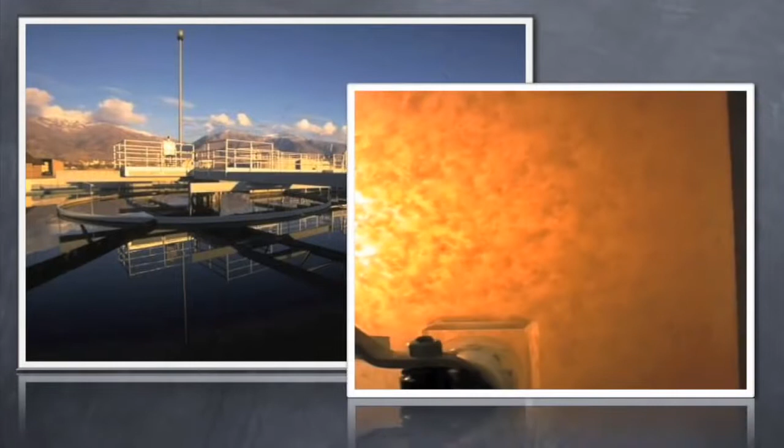The purpose of this video is to help you better understand the function of a clarifier and start you on your path towards effective clarifier operation. The purpose of a wastewater treatment clarifier is to slow the water down enough such that suspended particles can be separated out by the force of gravity.

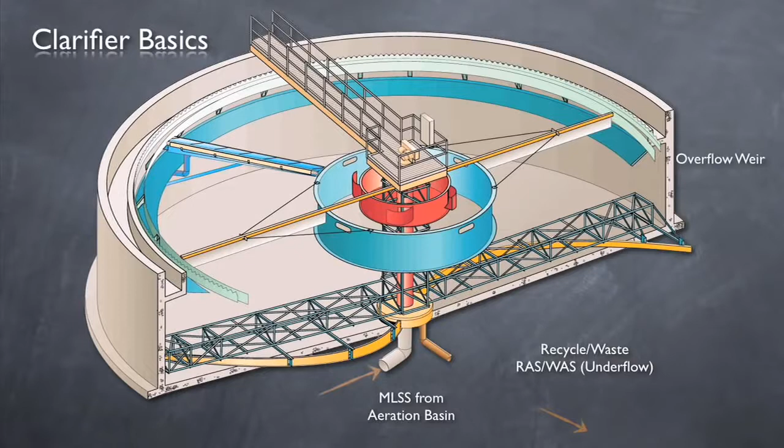Mixed liquor, typically from aeration tanks, enters through a centrally located feed pipe. From there, the flow has two ways out. First, settled sludge leaves through another centrally located pipe at the bottom of the clarifier and is recycled back into the system or wasted. This is the underflow. The second way is over the overflow weir. In a properly functioning clarifier, overflow water should look very clear. Finally, grease, oil, and other floating material is removed by a skimmer on the surface.

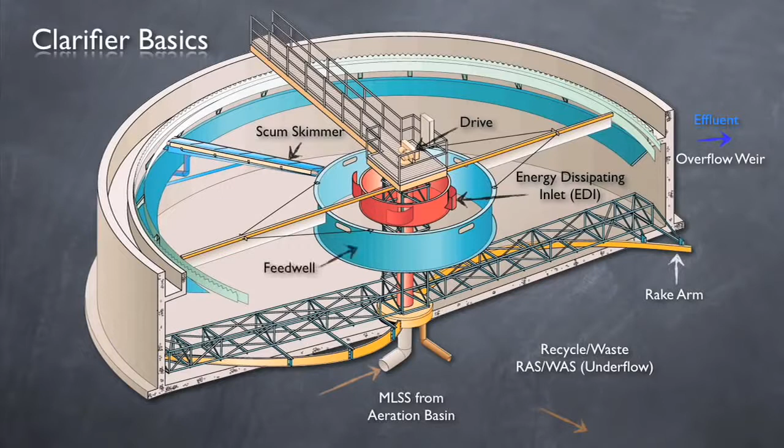Without going into too much detail, some other important components of a circular clarifier include the rake arms, an energy dissipating inlet, the drive mechanism, a feed well, and a density current baffle. To review, particles, represented by our bug here, enter the clarifier suspended in the water. As they enter the clarifier, energy is effectively dissipated, allowing the bug, which is more dense than water, to slowly sink, while the water eventually makes its way to the top of the tank and over the weir.

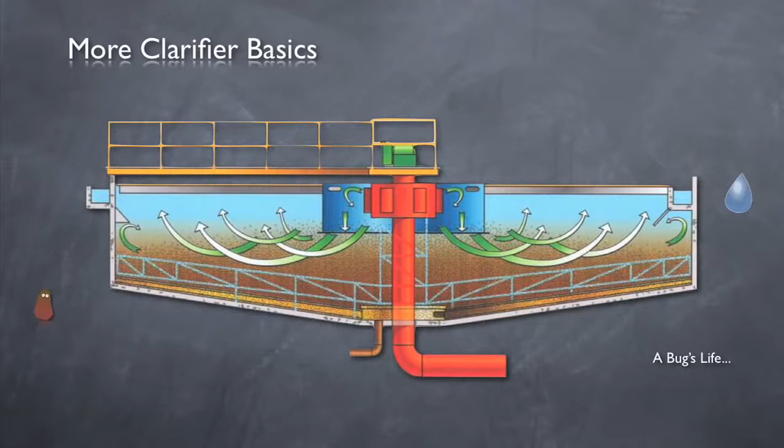Pretty simple, right? Well, a lot of work goes into making sure that a clarifier functions correctly. And one powerful tool which can help with successful and effective clarifier operation is the state point or state point analysis. Let's go through what the state point diagram is and what it represents.

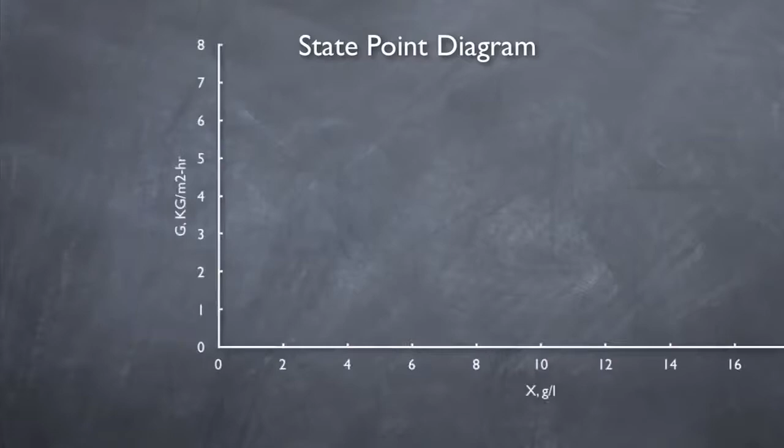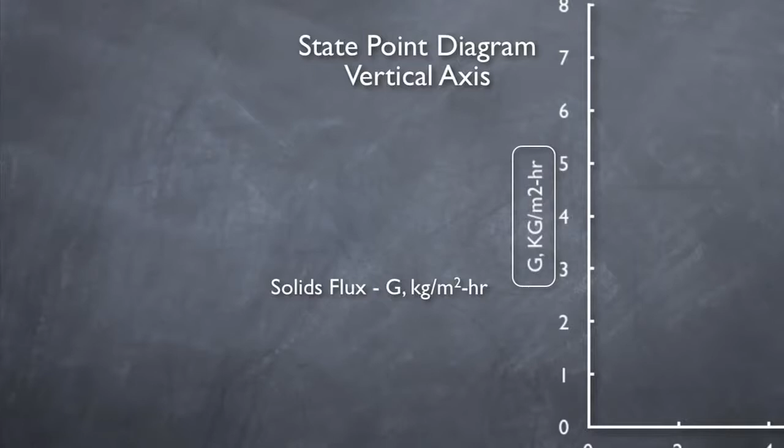The state point diagram consists of a horizontal axis which represents the solid's concentration, X, measured in grams per liter. The vertical axis represents the solid's flux, G, measured in kilograms per meter squared hour. In this case, the solid's flux is the mass of solids passing through the clarifier in 1 hour, normalized to 1 square meter of clarifier area. Now that was a mouthful. Let's try and simplify it.

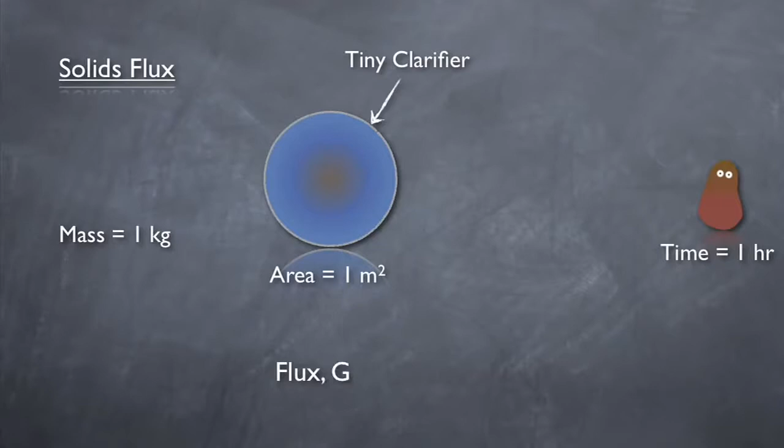Imagine a tiny clarifier with a surface area of only 1 square meter. The flux in this case would be equal to the total mass of solids passing through the clarifier in 1 hour. So if 1 kilogram of mass were to pass through in 1 hour, the flux would be 1 kilogram per meter squared hour. Now if the surface area of the tiny clarifier was doubled, but the same mass of solids passed through in the same amount of time, the solid's flux would be half. Why? Because it is normalized to 1 square meter of clarifier area. The amount of solids going through the clarifier didn't change, but the amount going through 1 square meter did, by half. By using flux, one can compare clarifiers of different sizes and loads on an equal basis.

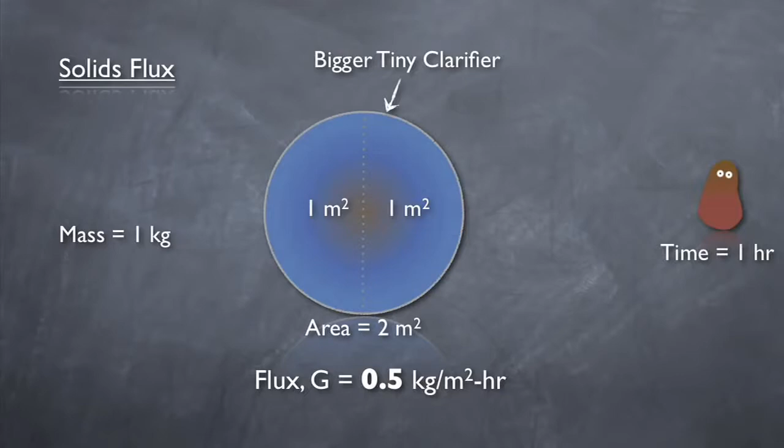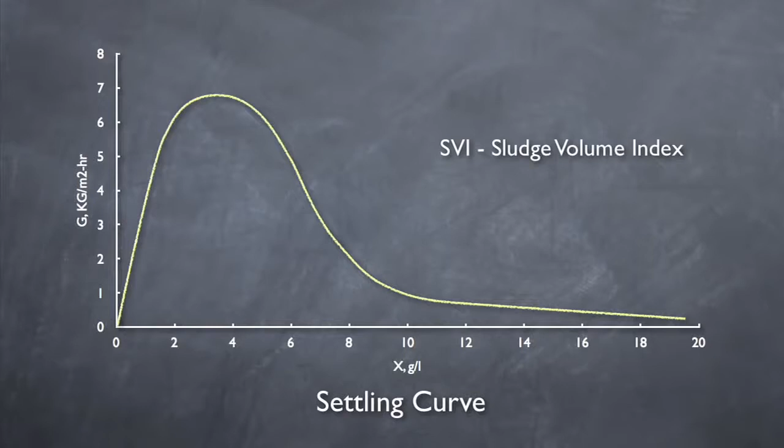Now that we've covered both axes of the diagram, let's get to the 3 main components. The first component is the settling curve. This curve is developed by performing velocity settling tests at various concentrations of mixed liquor on site. However, empirical equations based on the Sludge Volume Index, SVI, have been developed and are plenty accurate for deriving this curve. A smaller SVI, which represents faster settling, results in a larger settling curve. A higher SVI, which represents slower settling, results in a smaller settling curve. So what does it matter if the curve is larger or smaller? Well, we'll find that out in a minute.

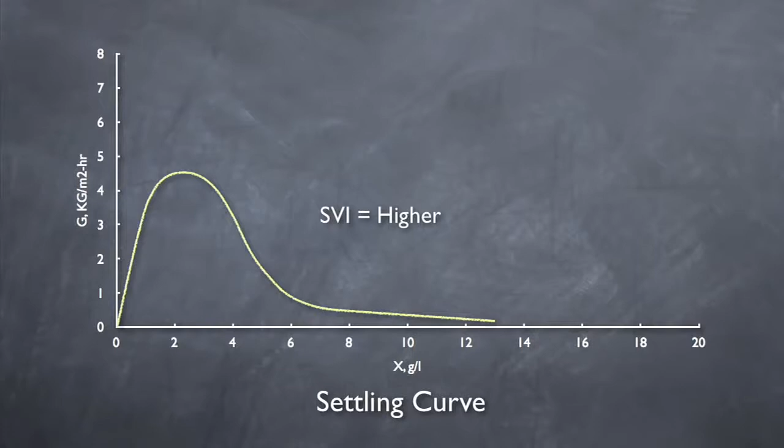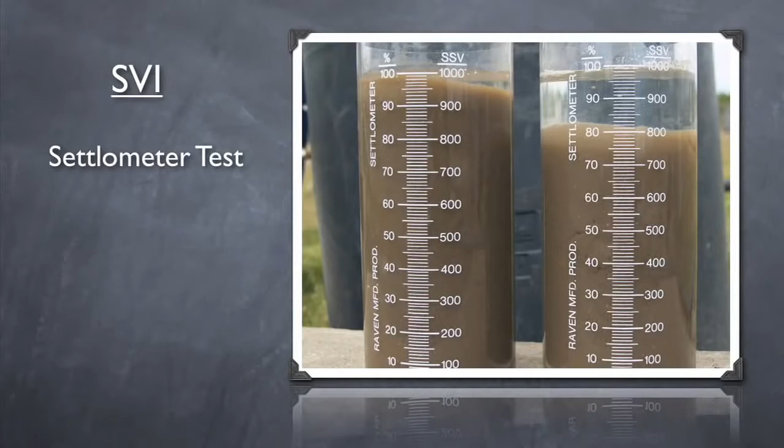But now that we know that SVI is important in determining the settling curve, how do we determine the SVI, and what causes it to change? Well, the SVI can be determined by performing a settlometer test. Also, if you can, use a diluted sample to determine your SVI. This will allow for more accurate results, especially when the SVI is higher.

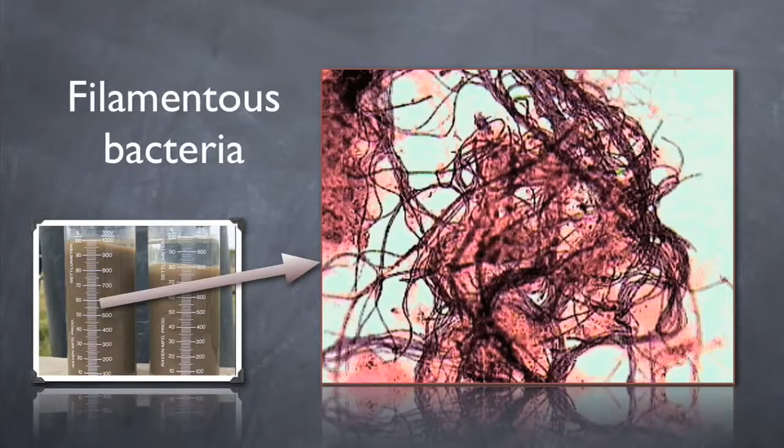SVI can be affected by a number of things. Almost all activated sludge develops some filamentous bacteria. However, sometimes the quantity of filamentous bacteria becomes abundant such that it settles poorly due to bridging of the floc. As a solution to this, some treatment plants have installed systems which allow them to dose chlorine into the recycle flow, which can significantly reduce the filamentous bacteria. Other process hiccups and influent contamination can also affect the SVI.

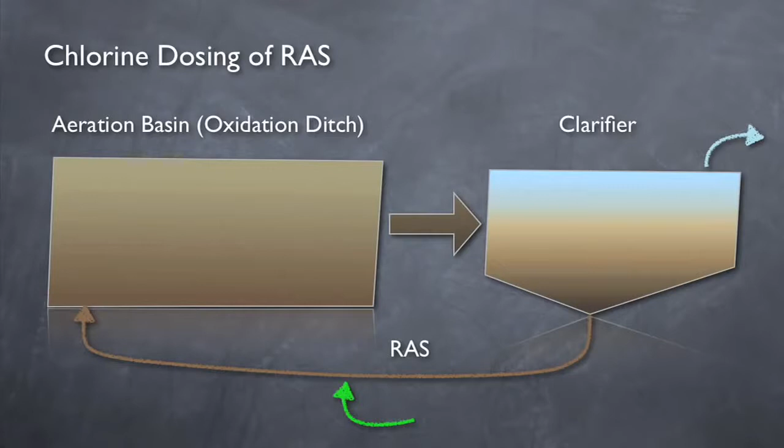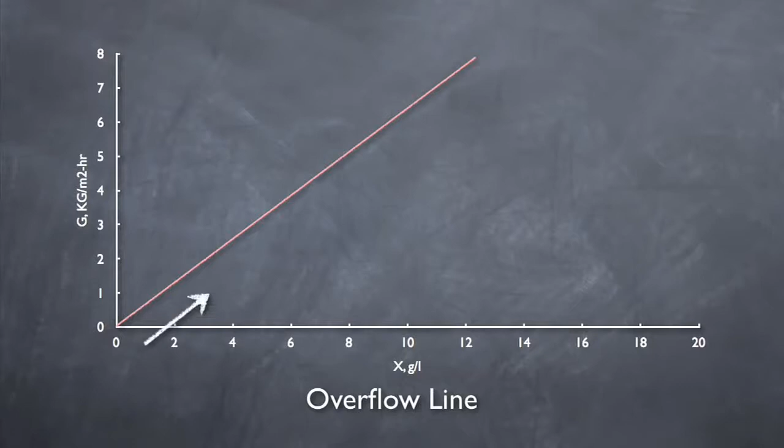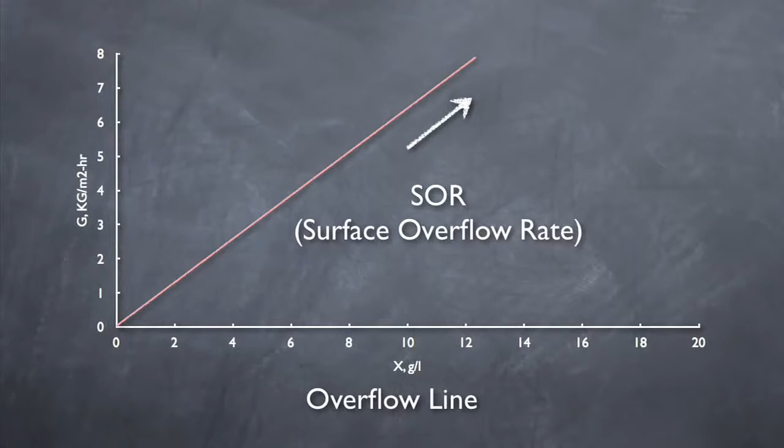The second component of the state point diagram is the overflow line. This line represents the flow through the clarifier. As the mixed liquor concentration increases, the flux increases also. The slope of this line represents the surface overflow rate, or SOR, which can be determined by dividing the influent flow by the clarifier surface area. It is important to remember that this line can be adjusted by changing the influent flow rate. A higher influent flow rate results in a steeper slope up. A lower influent flow rate results in a flatter slope.

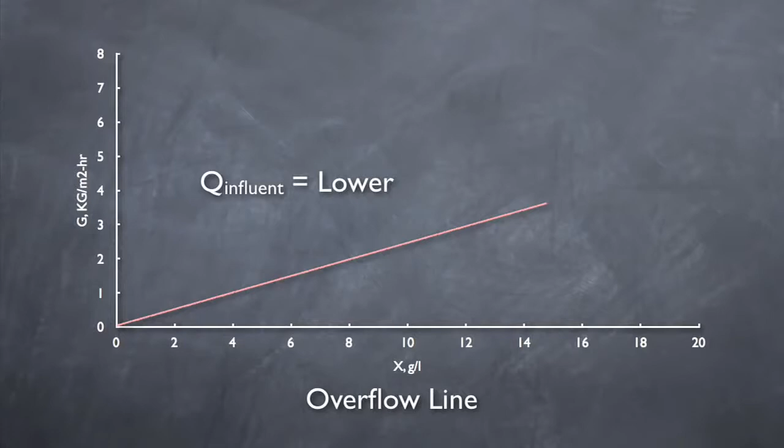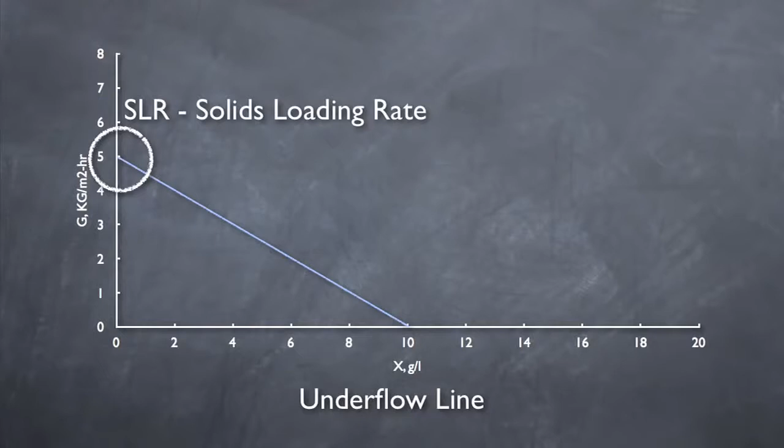The third and final component of the state point diagram is the underflow line. The y-intercept of this line represents the solids loading rate, or SLR. The x-intercept of this line represents the expected underflow concentration. The slope represents the solids underflow rate, or SUR, which is calculated by dividing the RAS flow by the clarifier surface area. This line can be adjusted in two ways.

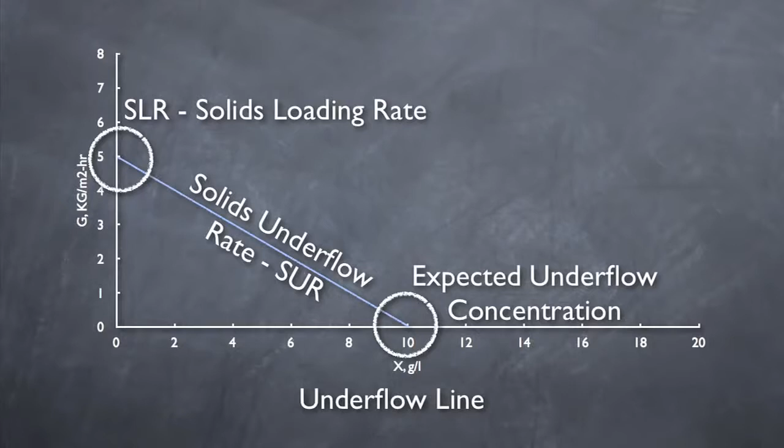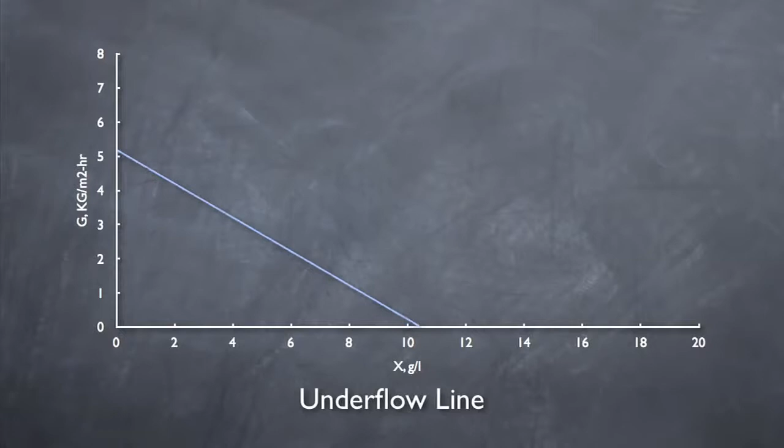First, by changing the RAS rate, you can affect the slope. A higher RAS rate will result in a steeper slope down. A lower RAS rate will result in a flatter slope. Also, the location of this line can be adjusted by changing the solid's concentration entering the clarifier. A higher concentration moves the line away from the origin, with the opposite occurring with a lower concentration.

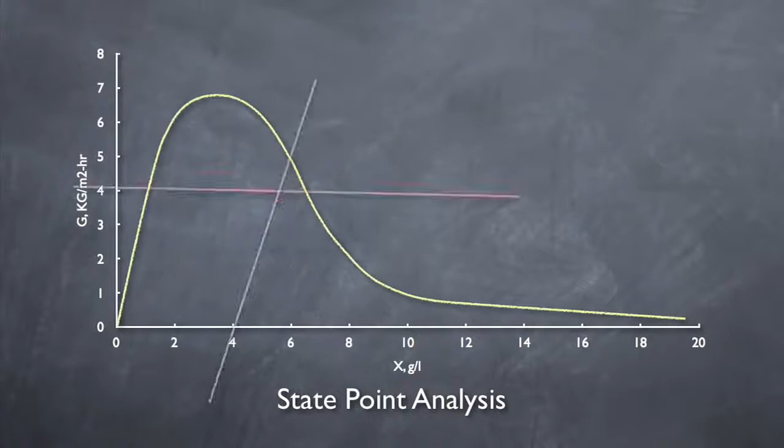Putting all the pieces together, we have our full state point diagram. So, how do we use it? We start by defining the actual state point. This is the point where the overflow rate line and the underflow rate line intersect. To ensure proper clarification, we want to make sure that this point falls underneath the settling curve. If this point falls above the settling curve, the clarifier is failing in clarification. In other words, the solids entering the clarifier don't have enough time to settle before going over the effluent weir.

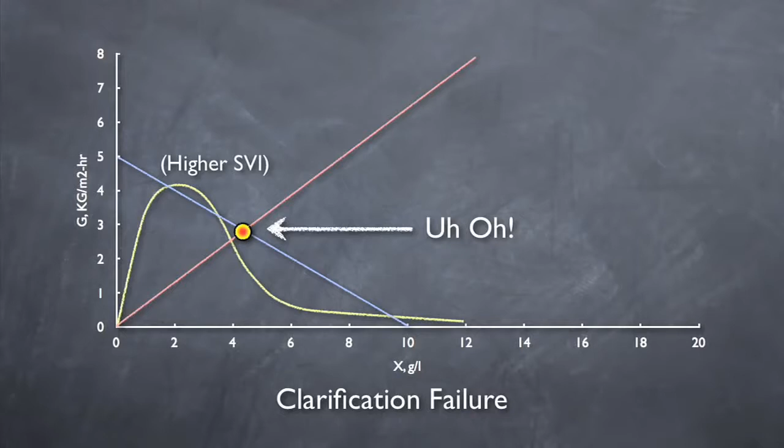This could be caused by increased flows, not enough RAS flow, a high SVI, or a combination of any of them. It is not a good place to be. At this point, the clarifier is not doing its job at all. However, getting the state point under the curve isn't the only goal. In order to ensure proper thickening of the sludge, we want to make sure that the entire underflow rate line to the right of the state point falls under the settling curve as well.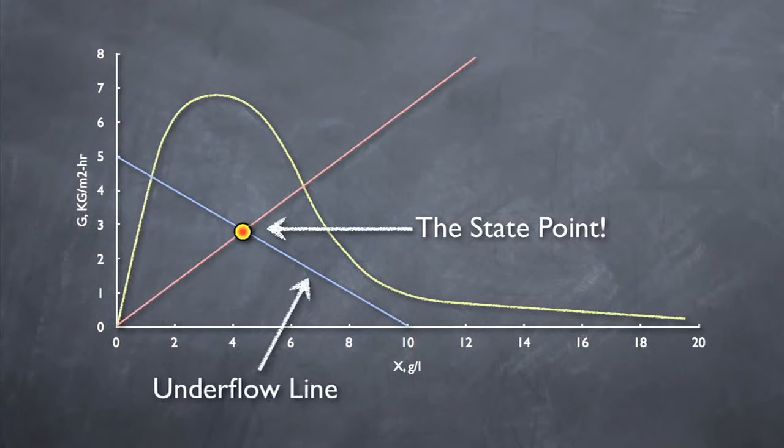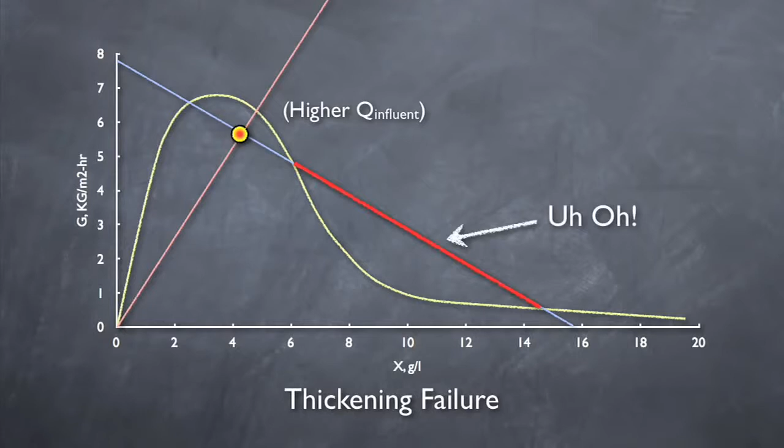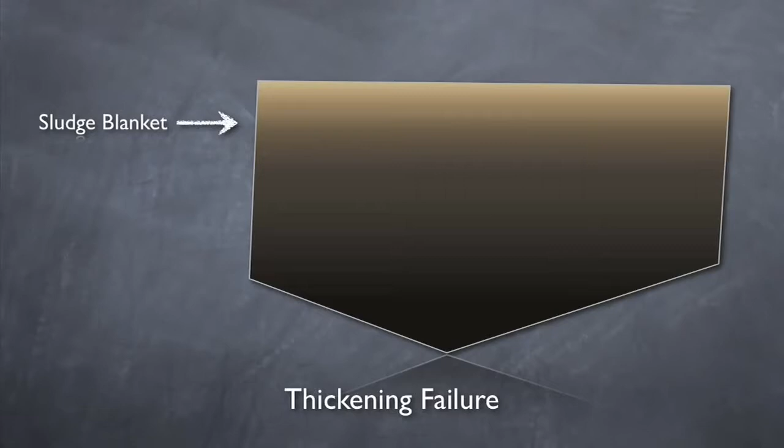If the state point is under the curve but the entire underflow rate line isn't, the clarifier is failing in thickening. This means that sludge is settling in the clarifier but isn't being removed fast enough. Under these conditions, the sludge blanket would rise in the clarifier until solids are passing over the weir. Thickening failure, like clarification failure, can be caused by high flows, low RAS, high SVI, or any combination. So if either of these scenarios should occur, and you were to fail in thickening or clarification, there is some good news. The system will eventually fix itself.

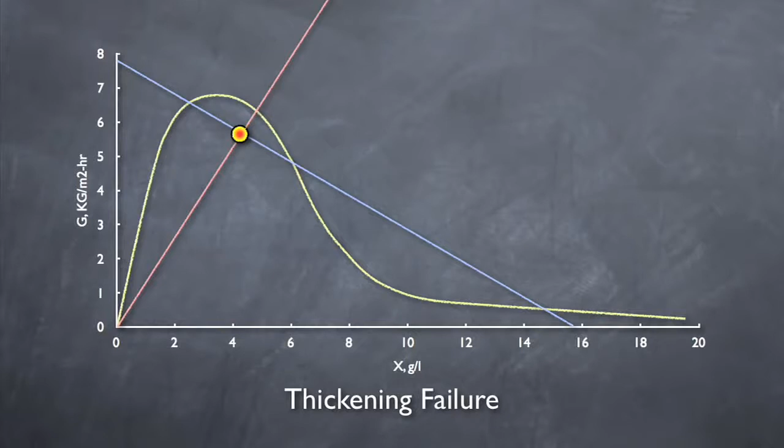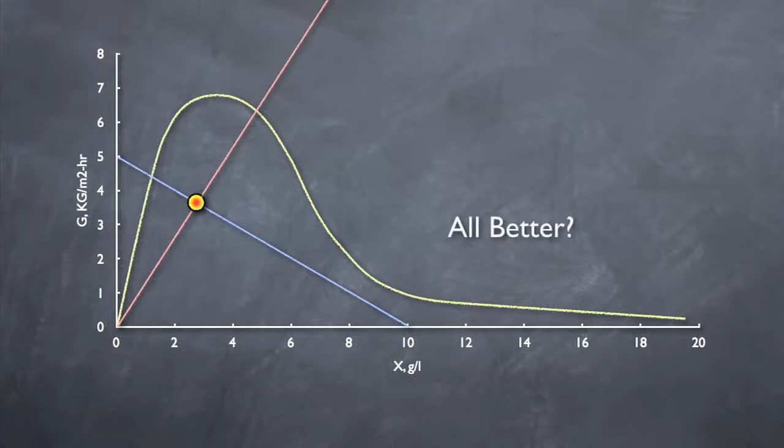How? Well, if solids are passing over the weir, the concentration of the system will decrease. And as we've already covered, a lower mixed liquor concentration will move the underflow line back towards the origin and eventually under the settling curve. The bad news is, if this happens, you probably just violated your permit. So the goal is to avoid either type of failure. Let's take a look at some real-world scenarios now, where the state point diagram can help you determine what actions you can take as an operator.

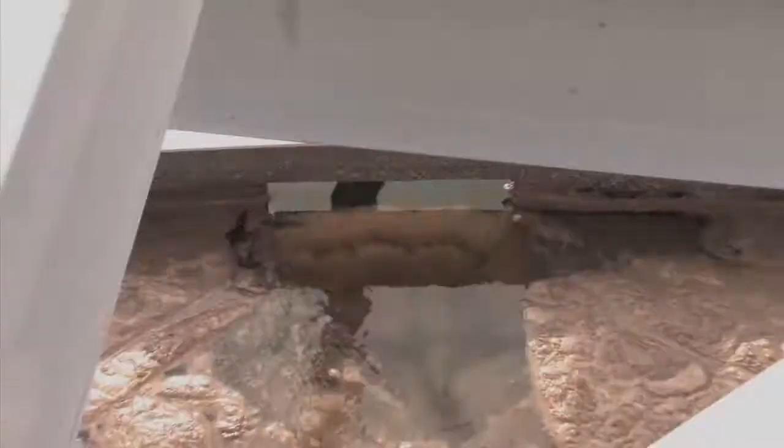For this exercise, we are going to use an actual state point model. Let me bring it up. This is one version of an interactive state point diagram that can be used as a tool in clarifier operation. As you can see, this model has three methods for developing settling curves. The first is based on actual measured clarifier characteristics. The second is an approximation developed by Dr. Glen Daigger. The third is a modification on the Daigger model called the Daigger-Roper. Let's simplify things and clear some values out of the other models and use just the Daigger model only.

The Daigger model allows you to construct an approximate settling curve based on the SVI. We're going to assume that we have some decent settling sludge here, coming in with an SVI of 250. Let's make the clarifier diameter 80 feet and specify that only one is in service. For this scenario, let's have everything going smoothly with an influent flow of 3 mgd, a RAS of 50% of the influent flow, and a mixed liquor concentration of 2,500 milligrams per liter or 2.5 grams per liter. Let's clear the second state point values now so we can focus on our single state point. And as you've probably noticed, this model adjusts the graph automatically and immediately, allowing us to quickly evaluate how things are going.

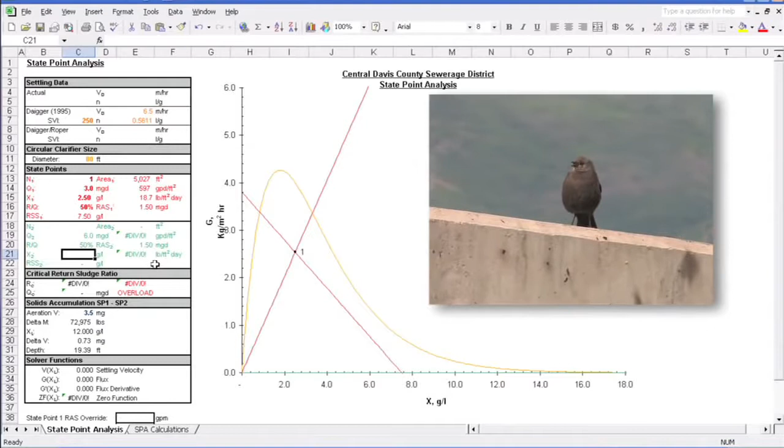Well, we see that in this case things are going quite well. Both the state point and the underflow line fall under the settling curve. Man, life is good. The sun is shining, birds are chirping, and the air smells fresh. Well, as fresh as a wastewater plant has to offer. But just like any rainstorm can ruin a perfect day, it can also ruin your smoothly operating clarifier.

So a rainstorm hits your system and the flows begin to rise. Before you know it, your influent flow has risen to 4 mgd and your RAS pumps don't automatically adjust with the flow. For this, we need to override the RAS rate. We see that 50% of 3 mgd is 1.5 mgd of RAS.

Now we need to enter the value in gallons per minute in the override box down here, which conveniently gives us the conversions to mgd. And because we're really smart, we know that 1.5 mgd is 1042 gallons per minute. So we can enter that in here and it overrides up here above. And now we can change our flow to 4 mgd. And as you can see, our state point stays under the curve, but our underflow line doesn't. We know we are going to fail in thickening.

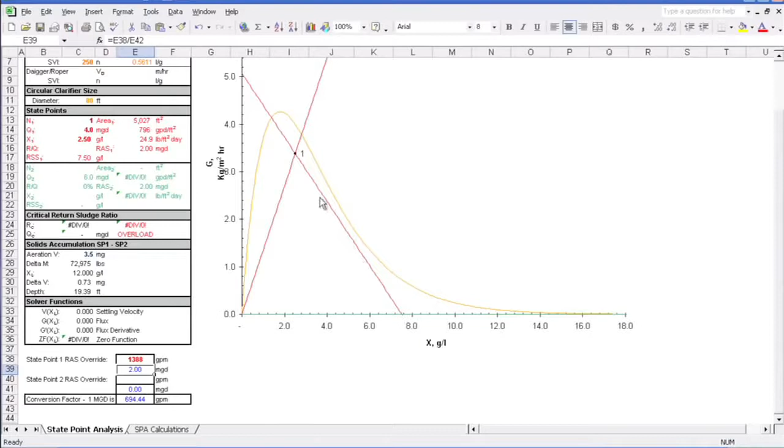So what can we do? Well, let's see. Say we actually have a little bit more capacity in our RAS pumps and can turn those up to 2 mgd. Well, does it help? Yep. As we discussed, increasing the RAS flow results in a steeper underflow rate line, and we're back in good shape. Good job, crisis averted.

But what would happen if flows continued to rise? Let's say to 5 mgd. Well, in that case, we'd be failing in clarification as well as in thickening. Also, as mentioned, we've already maxed out our RAS pumps, so we can't pump any more out of the clarifier. In this scenario, there are two options.

First, if the flow increase can be predicted well in advance, there exists the option to preemptively waste solids to reduce the mixed liquor concentration. In this case, if the mixed liquor concentration was preemptively reduced to 2.2 grams per liter, we see that we'd be back in the safe shelter of the settling curve. However, this is not a realistic approach to dealing with unexpected high flow events that occur from time to time.

Typically, the only other option available in this scenario is dosing your RAS line with some chlorine. A quick dose of chlorine in the RAS can attack the filamentous bacteria and lower the SVI. If the chlorine dose was able to drop the SVI down to 200, we'd find ourselves back in the safe zone. However, this option is only available to treatment facilities with the proper equipment installed.

So now we've seen some ways to avoid failure, but the state point diagram can also help optimize clarifier operation, not just prevent problems. Let's go back to our nice, properly functioning clarifier. The SVI is back to 250, the flow is 3 mgd with the RAS running at 50% or 1.5 mgd, and this time let's say that we've wasted some and our mixed liquor concentration has dropped to 2,000 milligrams per liter or 2 grams per liter.

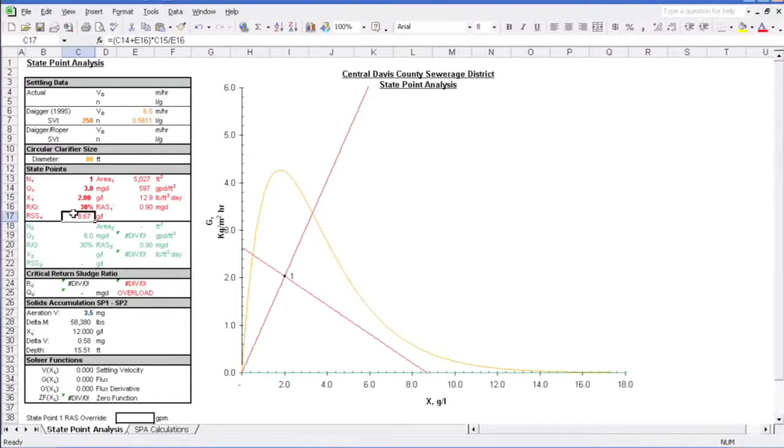Well, that was a great start in using the state point analysis to better operate a clarifier. Now take some time to run through some of your own scenarios. I'm sure you'll find this method beneficial, and you might even learn something new by using it.